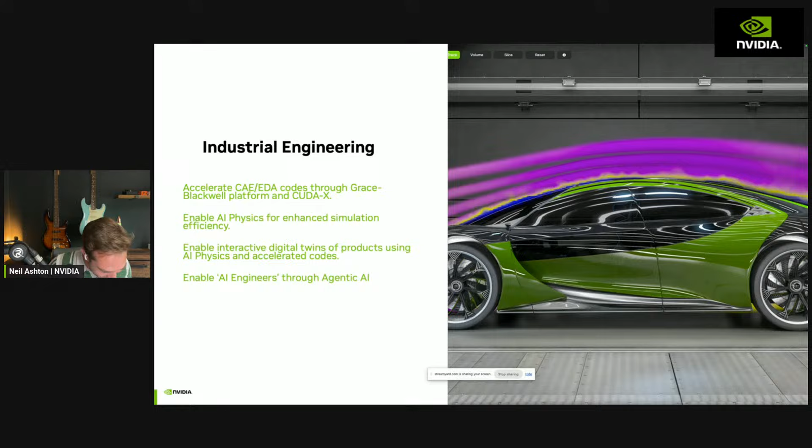Good morning. I've got some of the comments here, so I'm just trying to keep an eye on who's actually here. So some person says good morning, so good morning. It's obviously evening for me because I'm in the UK.

So let's go through some of these. So the first one, I guess, is no surprise, right? It's how do we accelerate some of these codes? So if you're doing CFD analysis, so my background is computational fluid dynamics. That's how I started. I was and am an engineer. But I actually did it in real life, trying to come up with cars and things like that. I worked in Formula One a little bit, although more as one of the CFD methodology geeks than the cool people designing the car. I never got to do that.

But the first one is how do we make those codes faster? And that's for obvious reasons, so that you can either get the simulations you run today back sooner, so you can do more designs, or do simulations that maybe you couldn't do before. And there is a difference to those two, but both of them are covered, I guess, by the first pillar. And we'll go into some of those details.

The next one is AI physics. So AI surrogate models, ways of developing, training AI models that can enhance the efficiency of your simulation. This isn't a replacement for Pillar 1, but it is a really interesting area that probably many of you have started to look at, where you can get that real-time prediction, something that, even if you throw 100 GPUs at a problem, it's probably not going to become real-time. And that's where the AI comes in.

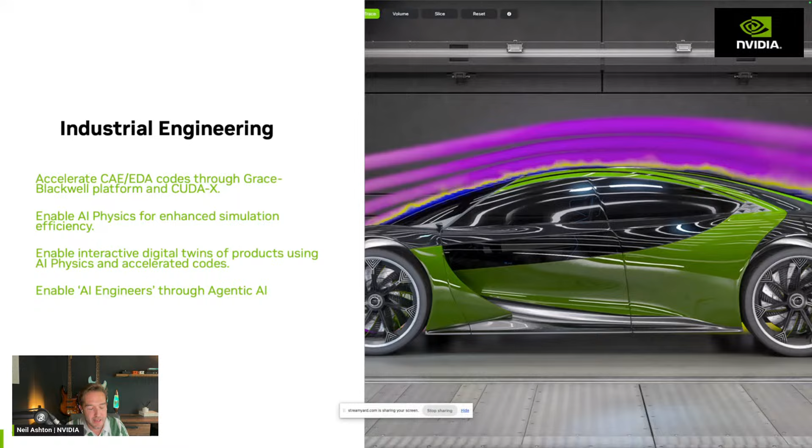And finally, the one that has been a bit of an obsession of mine recently to look into is the whole agentic AI. Like, how can we build an AI engineer that you as an engineer, and I'm assuming you are an engineer listening to this, can use as your helper to automate and do things faster? So between those 4 areas, that encompasses the focus that we have inside NVIDIA when it comes to industrial engineering. So let's walk through that in a little bit more detail.

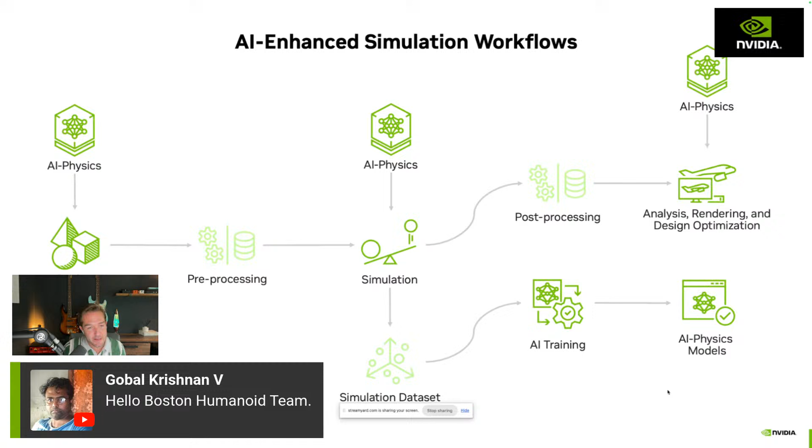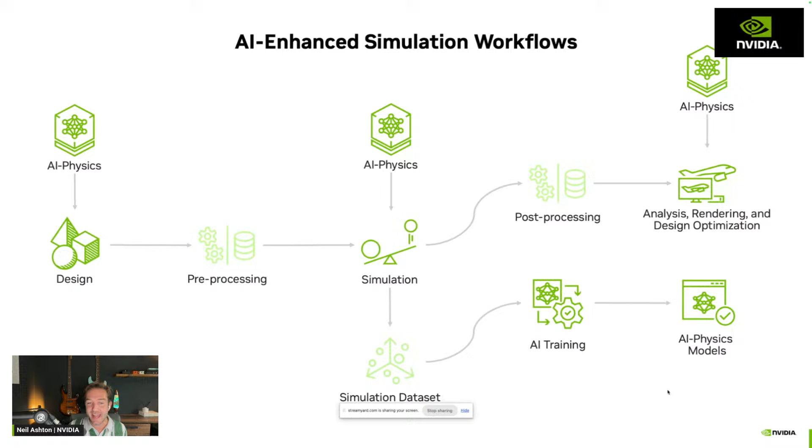Now, the final one, which is, I guess, the dream in a way, is how could you use AI to go around the whole loop? How could you use it to do the design optimization and ultimately use AI to generate a geometry or case that meets your needs? The point of this diagram, I guess, is to show the possibilities of AI. And it's in every bit, and many of them are interconnected.

And one of the things that we have, and this actually started more than a decade ago, I think, I could be wrong exactly on the timing, is PhysicsNeMo. So PhysicsNeMo is an open source framework that really is designed for you as a developer, and I will make a distinction between a developer and an end customer, where the main focus is for a developer to be able to train models, build architectures, and take the cutting edge science and use it within a design process.

I say that because, and this is a good slide to re-emphasize it, we love working with partners, startups, ISVs, developers. And so when I say go and use PhysicsNeMo, really we want a developer to take it, and then maybe you're going to put it into your code that you go and take to an end customer.

PhysicsNeMo isn't really an end customer tool, it's a developer tool. And so we're really excited when we see ISVs and startups take PhysicsNeMo into their package that you can go and take. And I'll speak about that in a moment.

So one of the things I want this live stream to be is not just slides, right? Not just slogans. I want to get into some of the technical details. So for that reason, I'm going to jump out of this a sec, and I'm going to show you some of the really interesting research and papers that are backing up some of these claims.

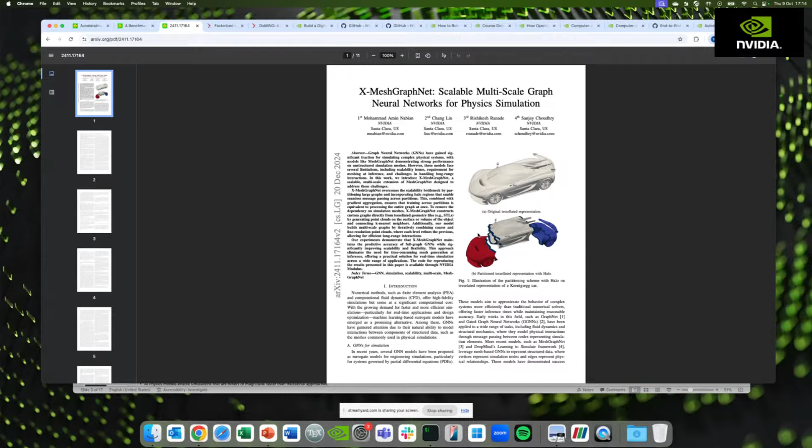But all of this is to say that when I say that we're working on AI physics, that is at a whole level. It's at the fundamental science. We have colleagues in NVIDIA Research who are doing fantastic work as well with the PhysicsNeMo team. And the whole point is to bring that to our ISV and startup partners, and hopefully they can then deliver it to you through the packages you use today.

Okay, so that's again a bit of a teaser. Hopefully I haven't put you off by showing too many journal papers. I'm sure the people behind this live stream are freaking out going, why are you showing so many journal papers? But sorry, I am an academic by heart, so this is what I like to do.

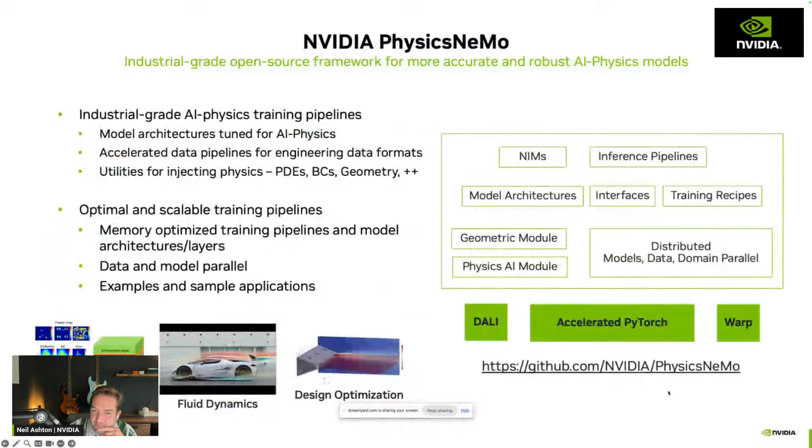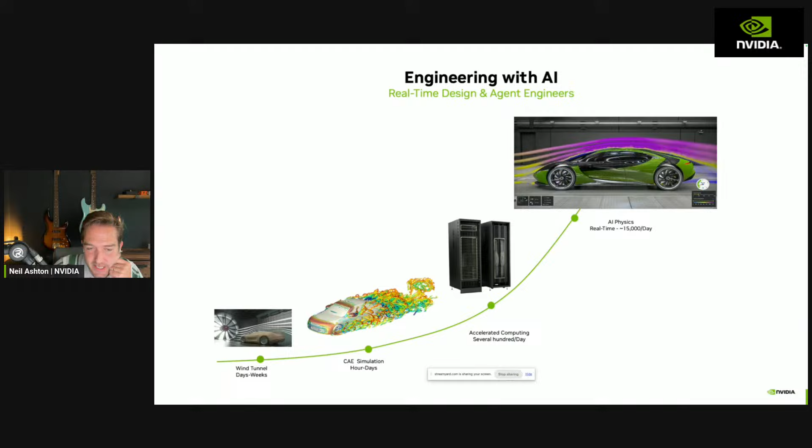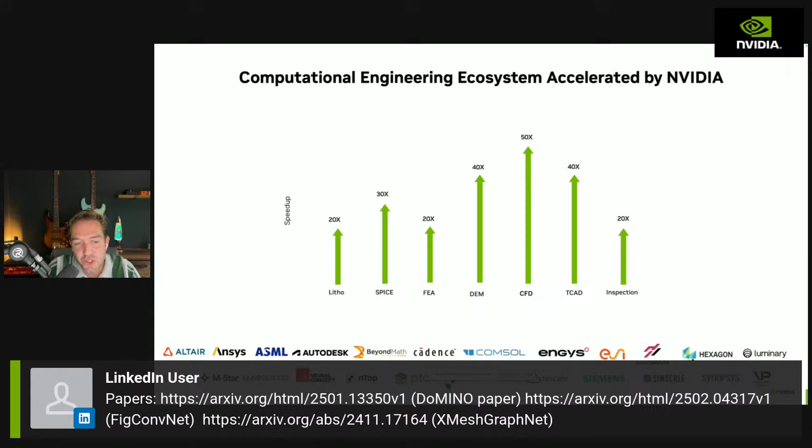One of the things we focus on is the first pillar: how do we accelerate the codes? We work with all these different startups, ISVs, government codes, and we have some amazing people, some called dev techs - real smart guys and girls who know how to optimize codes and work hand in hand with these companies to tune them for the latest NVIDIA GPUs. We see orders of magnitude speedup across the range, not just in CFD, but in EDA and FEA. But one of the things people don't realize is CUDA-X.

I must admit, I came late to the party in appreciating some of this. We've got quite a cool video I'd like to show. I hope you've got headphones in because there's a really nice soundtrack and talking. So I'll let the video play, and it talks about CUDA-X, what it is, and how it's transforming things. So maybe, Mark, if you could play it.

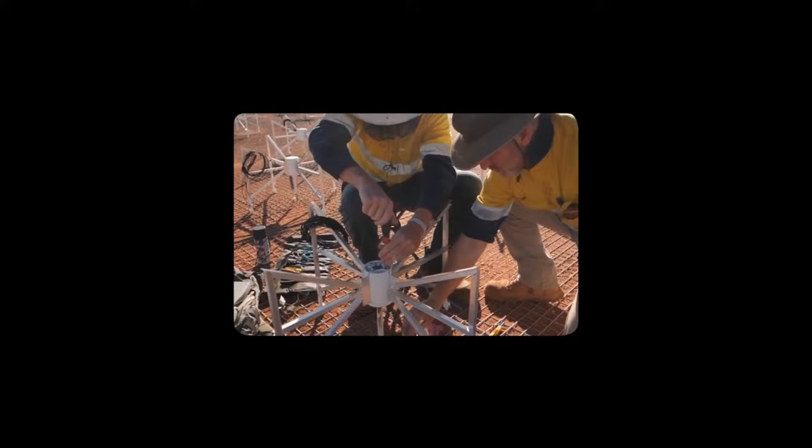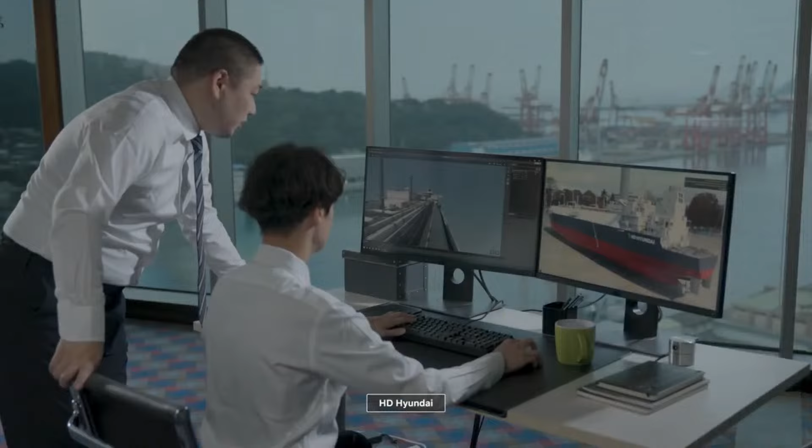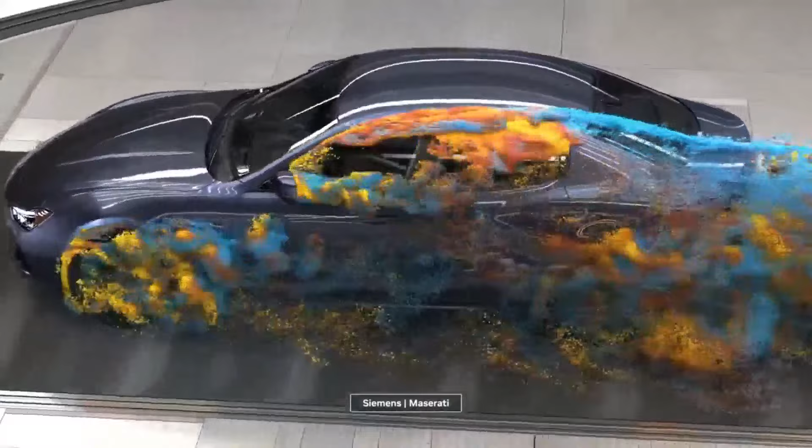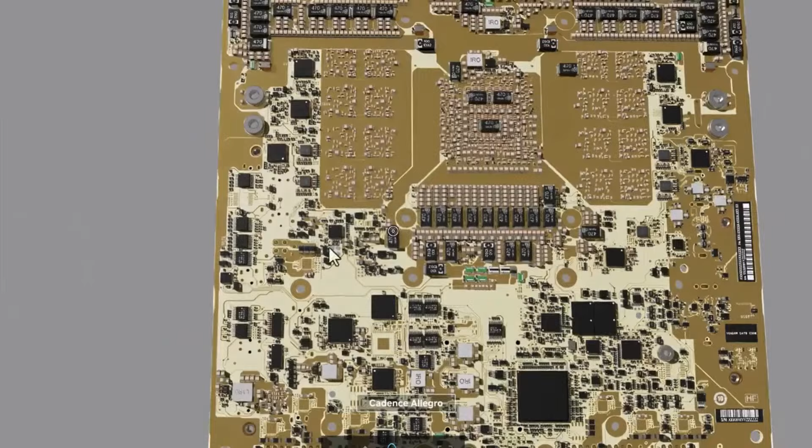To the creators, the pioneers, the builders of the future, CUDA was made for you. Since 2006, 6 million developers in over 200 countries have used CUDA and transformed computing. With over 900 CUDA-X libraries and AI models, you're accelerating science, reshaping industries, and giving machines the power to see, learn, and reason. Now, NVIDIA Blackwell is 50,000 times faster than the first CUDA GPU. These orders of magnitude gains in speed and scale are closing the gap between simulation and real-time digital twins. For you, this is still just the beginning. We can't wait to see what you do next.

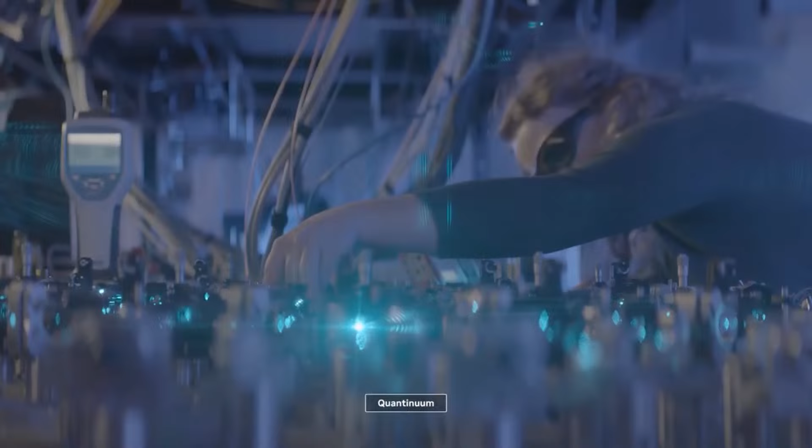Yeah, for me that video is so cool. I actually have goosebumps, you can even see it on the camera here. The headphones, the music - and I should say, there are some amazing people who work on those montages, amazing technology and creative people that really bring it to life. The soundtrack seriously always blows me away, and it helps show the work our partners and customers are doing in this space, and hopefully motivates you to see why it's actually changing how we can do things.

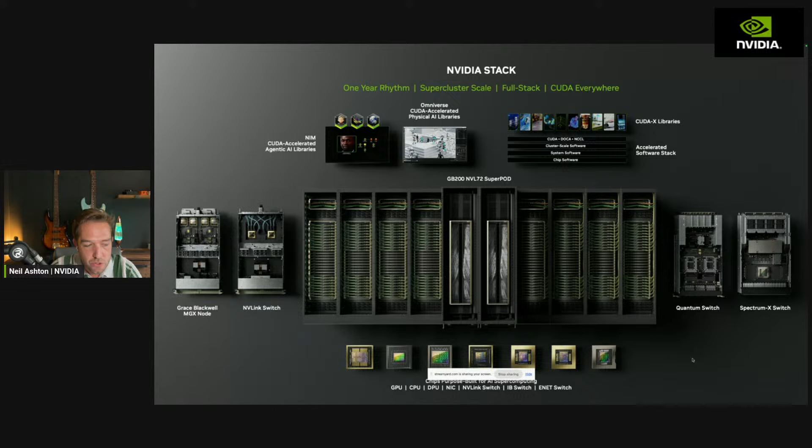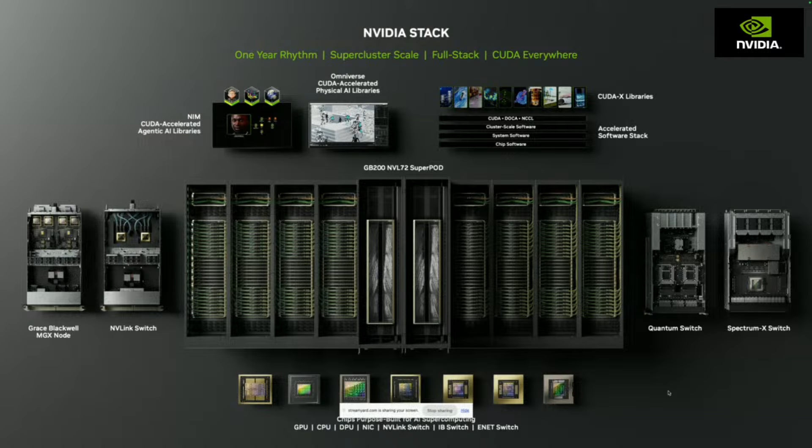So if you're a developer who wants to write their own GPU native code, I would definitely look first at whether you can use some of these libraries rather than do it from scratch. You could do it from scratch, but we've put so much time and effort into doing it. And every time a new GPU comes out, we've already worked on optimizing it because, of course, we've had access to it internally for a while.

So that's why I talk about CUDA-X. You can have a look on the website. If you type CUDA-X, there are hundreds of different libraries, and we'll have a deep dive on that—on the CUDA libraries and what's relevant for CAE and EDA—and we can talk about that a little bit more.

But okay, I just wanted to say, I promised this would be 20 to 25 minutes, and it's already at 22 minutes, so I probably should speed up a little bit here. We can have a session on hardware, talk about the nuances, and geek out on hardware—we can definitely do a session on that as well.

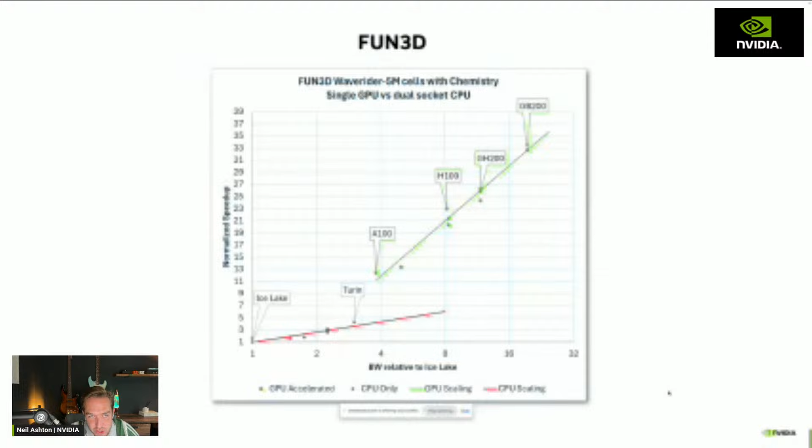But what I wanted to do was show a few examples. This was a great slide for FUN3D, which showed the normalized speed up versus the bandwidth. The point is that the bandwidth going from A100 to H100 to GH200 to GB200 keeps going up and up, and you're able to realize that speed up, whereas the speed up on the CPU curve is so much slower. So do you see why the generational jump, why moving—you want to be on the green line?

Because as you can probably extrapolate where the green line's going next, the red line keeps being further and further away. And that's actually an interesting comment—if you tested on like an A100, you really should test on a GB200, because whatever speed up you saw with the A100 versus your CPU code, you will see tremendous speed up by going to the newer generations.

Now, the danger of me trying to show some partner slides is I probably haven't got all the partners, and someone's going to shout at me for not including some partner—that's not intentional—but I did want to bring this out because I want to take a few as an example.

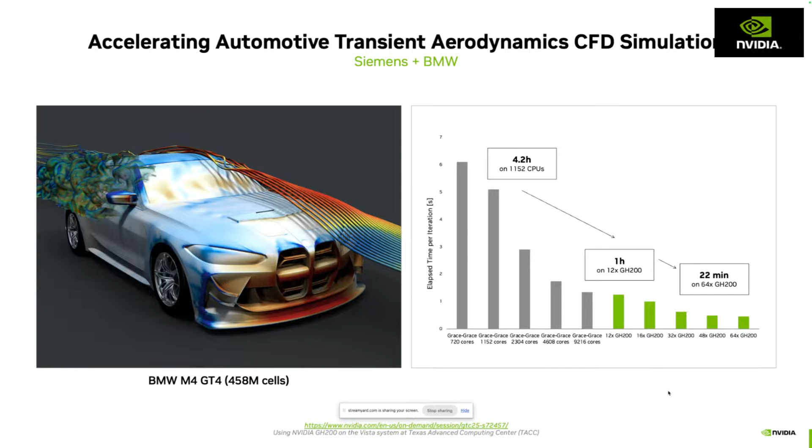But it was a great talk talking about the nuances, how the evolution had gone with the Siemens product. I think this was Siemens STAR-CCM+, and how they'd gone from like 4 hours to 20 minutes, and some of the nuances of the setup cases. So definitely want to call out.

This other one was really cool. This was with Cadence. So this was some work that was done for aeroacoustics, for turbo machinery. So like 50 minutes on a B200 versus 70 hours on a CPU.

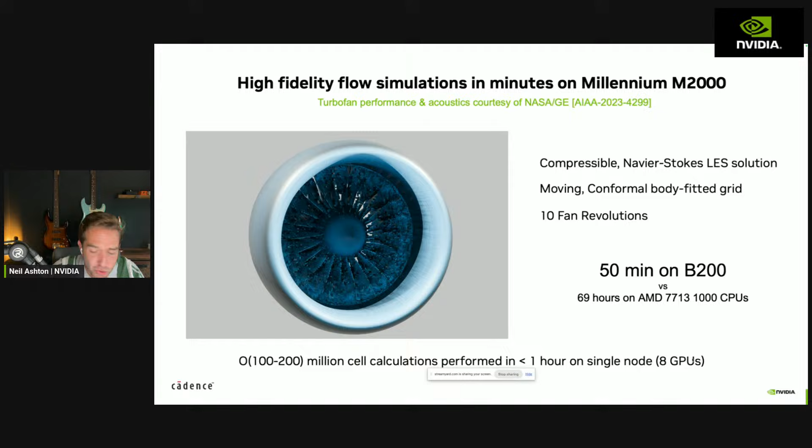So all of this is just to basically say that there is so much transformation now in doing - and for people who understand what I'm talking about on this, when it comes to doing bigger simulations like wall-resolved LES, doing finer meshes, it's not just about running your simulation faster, it's about doing things you couldn't do before.

Okay, changing track a little bit now, going back to maybe a little bit more the - oh shoot, I forgot to show you the demo. Right, let me do that. Okay, I wanted to show you this, and you can see how disorganized I am. Okay, well let me just reconnect this, hope this works. Okay, so one of the things that I was hoping to show you, okay, I really hope this works.

Yes, brilliant. So I spoke before about AI physics. I spoke before about digital twins. But it was sort of hard for people to visualize what it would be like. You know, we've got a developer toolkit like PhysicsNeMo. We've got Omniverse.

And we wanted to give people an easier way of understanding the art of possible. We wanted to help ISVs and startups see the potential of this technology. So what we did was we created a blueprint, a reference architecture. It's not a product, it's just a reference architecture to show the art of the possible. And you can go to this website, and we can put the link in the chat. But basically what it does is it gives you the ability to do a real-time.

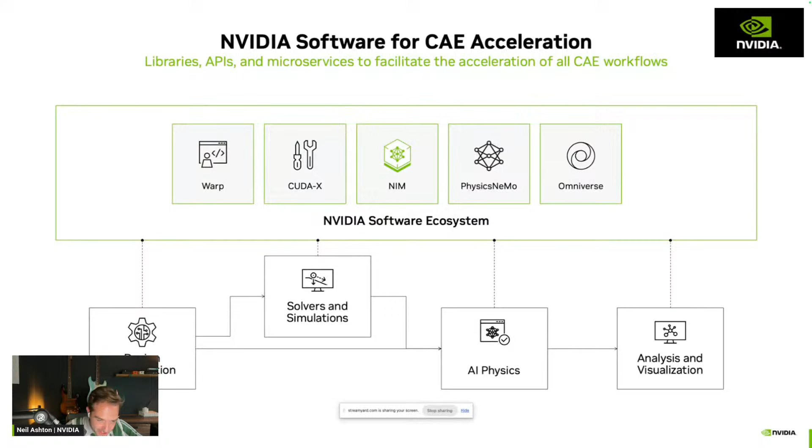Okay. Very nearly finished because I promised. I usually talk too much and write too much, and I promised this would be a short, snappy one. So I will finish it soon, I promise.

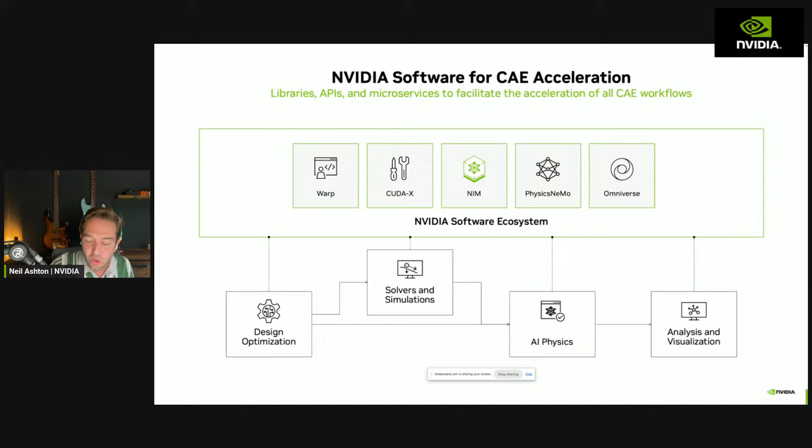This is like a bit of a summary. So Warp, CUDA-X. We didn't really talk about the NIMs. We can talk about the NIMs next time. PhysicsNeMo, Omniverse, they all come together. There's a cool thing on Omniverse here. This was the whole point of the digital twins. That's really, hopefully, a rush through, but it wasn't so much a rush. I think we did it in about half an hour, talking about some of the work that we're doing.

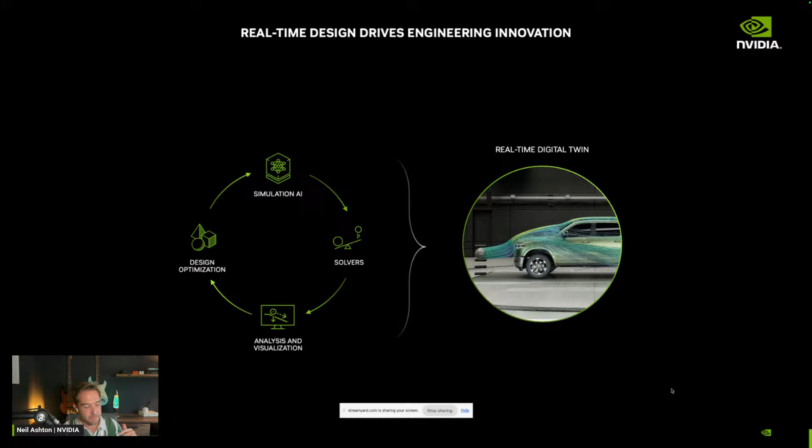I will stress it again at the end. NVIDIA's strategy or vision or desire is to enable you as a developer, whether you're a developer, an academic, at a government, a developer at a startup, a developer at an ISV, to help accelerate your program that you would go in and take. So that's why it's great.

And I had that big list of ANSYS and Siemens and Cadence and Synopsys and Neural Concept and PhysicsX. I'm probably going to miss out names, which is always dangerous when, you know, people get insulted. Hopefully I'm mentioning all the companies, like Dassault and others who we work so closely with. And it's great because hopefully then you can just go and double click and download their tool.

But hopefully you enjoyed this. And what we're going to do is we will have a series now of deep dives. I think we're probably going to do the AI physics one first, which is going to go into deep diving exactly on how some of these work, some of the ML architectures, some of what our partners have been doing in this space, some of the latest science, some of the latest research, how it applies for CFD, FEA, EDA. So please stick around.